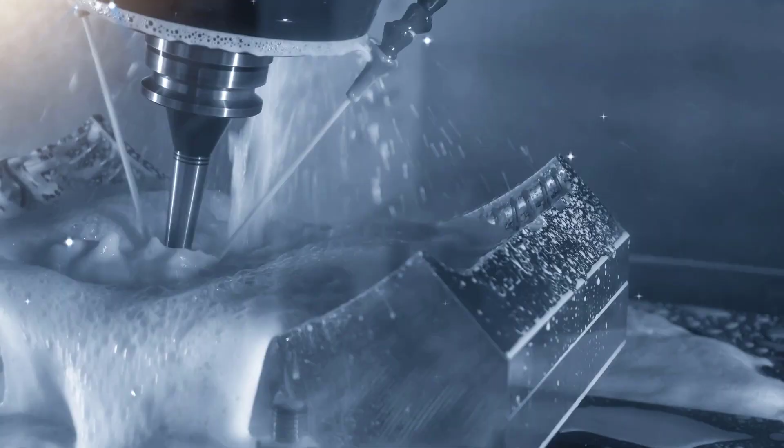My name is Stephen. Today we're going to explore the power of 5-axis machining in GibbsCAM. Let's get started. We're going to be looking at the 5-axis module today for simultaneous machining in GibbsCAM. Let's open up a 5-axis process to start.

Before I create a toolpath, we'll just look at the process dialog for the 5-axis module. This is the options tab. It has your speeds and feeds, and you can duplicate and rotate toolpaths, which CS you're going to be machining in. GibbsCAM 5-axis supports 3D cutter radius compensation, so you can adjust the toolpath at the machine for size.

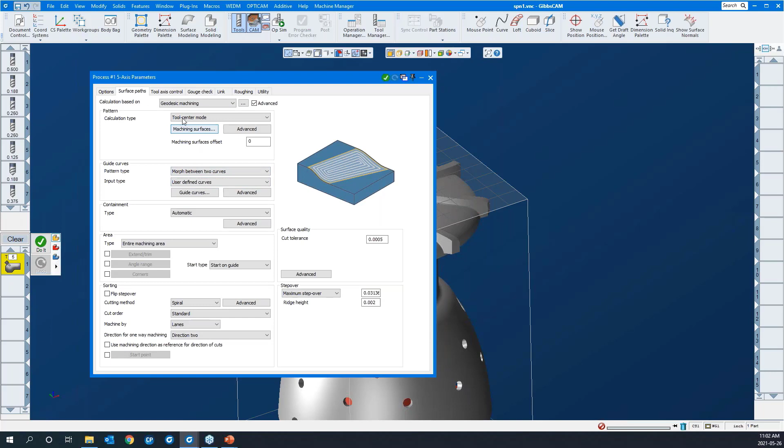If I click on the surface paths, you'll see that GibbsCAM is very graphical in the 5-axis module. You'll see any field I click on, a diagram appears to let you know what the system is expecting. And that's right across the board, almost any field you click on. So it's very graphical, and it's a joy to use.

Okay, you'll notice I'm in tool axis control, and we'll be machining in full 5-axis simultaneous. You can also go 4-axis simultaneous, or you can lock both rotary axes and machine in 3-axis as well, in XYZ. So we'll be looking at that as well.

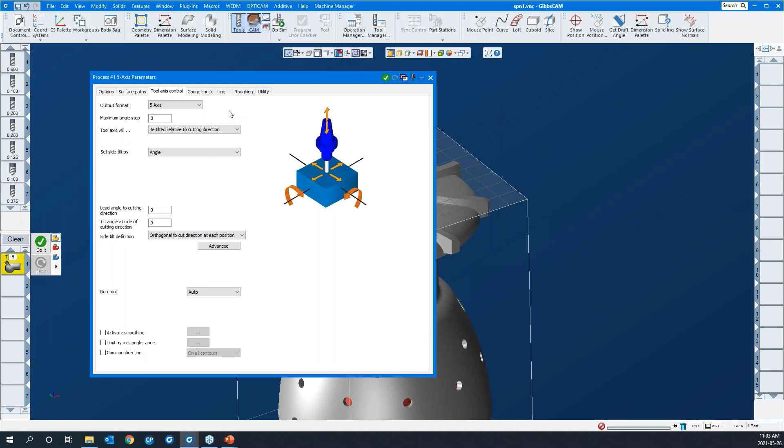Also, there's a lot of power to the 5-axis simultaneous machining strategy in GibbsCAM, and a lot of depth to it. If I just go over my calculation based on, if I'm selecting surfaces, there's a series of sub options here for different toolpath options. If I select triangle mesh, you'll see there's another subset of toolpath options. And if I go to wireframe, you'll see likewise.

So there's very many options here, okay? And we're going to cover a few of them here today. If I go back to options, you'll see there's a whole other set of toolpath options here as well. They're pointed 5-axis strategies, and we'll look at least at the drilling one today.

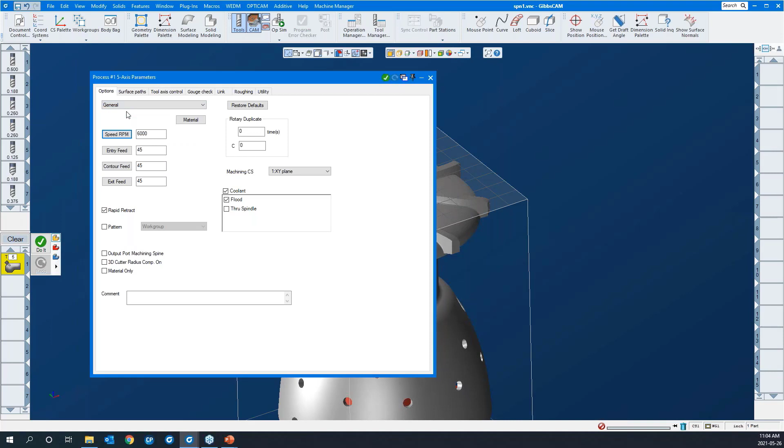Let's go ahead and create a toolpath. Okay, so our options tab is good. We're set like this. I'll go to surface paths, and I'll select surfaces to start. We'll go morph between two curves. I'll just select the first curve like so.

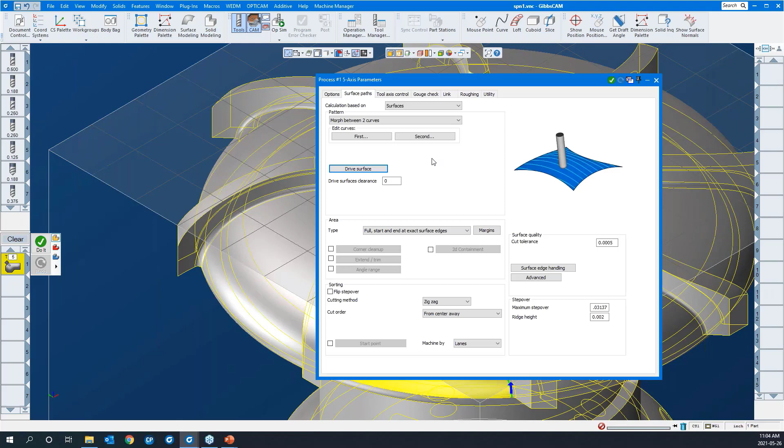And I'll say, okay, the second curve will be in here. And then the drive surface, the surface we're actually going to be machining, is this one. So those morph curves are containing the toolpath, and we're going to be machining onto the yellow surface here. Start and end at exact edges, meaning the tool is going to travel right up to these morph curves that we've selected. But if we did that, it would perhaps overcut.

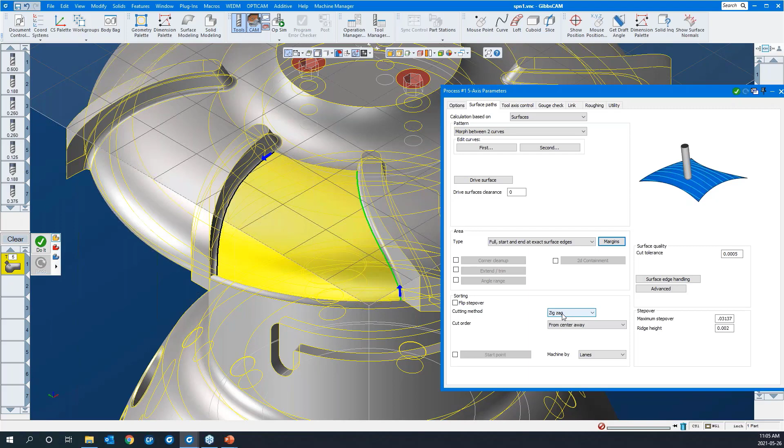So we can go to margins and add the internal tool radius, which is the radius of the tool we're using, which in this case is an 1/8" ball mill. So that'll shift the toolpath over by that amount. We're going to cut a zigzag toolpath, and we'll just use a standard. So it'll go from the left or right based on our decisions.

There's the machining tolerance. We'll keep the step over rather coarse while we're developing the toolpath. It'll calculate quicker. And once we're happy with the toolpath, we can tighten up our step over to create a nice surface finish. In tool axis control, we'll select full 5 here.

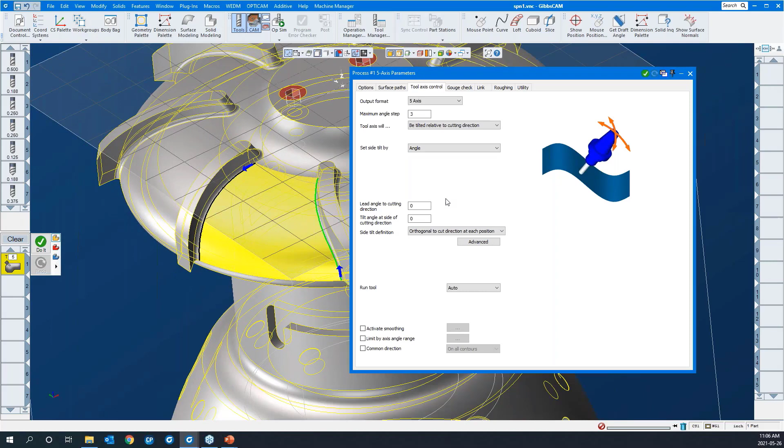There's dozens of options to control the tool axis in relation to the surface it's cutting. By default, the tool axis wants to stay perpendicular to the surface it's cutting. And for many reasons, you can alter that by adding a lead or a lag angle or a side tilt as well. And we'll discover them as we go.

In the gouge check, this protects the part from the flutes where required, or the shank of the tool, or the arbor as well. We'll come back and look at that where required. We typically only apply gouge check strategies once the toolpath is created and we see that there's a problem, when we need the tool to move away from any given feature.

The link tab is a very important part of the 5-axis module. These are important components of the toolpath. This is our first entry and last exit, okay? So the lead in and lead out. Gaps along cut are very important, okay?

What is a gap along a cut? Well, this diagram kind of displays that. And so if the system encounters a gap, do you want it to go direct or follow a surface, or it can blend the spline, or it can start retracting to different feed or rapid moves as well, okay? And then you can differentiate between a small gap and a large gap and have the system behave differently based on those.

Another one that's quite important is these links between slices. Well, what is a link? A link is the little piece of toolpath that joins the entire process together. So if you have a zigzag toolpath, there's a little piece of toolpath that links it together, and that is called the link as well. So you can go direct if you choose, or again, some of the similar options. If it's a far distance, you can have it retract to a feed distance or a rapid distance, and so on and so forth.

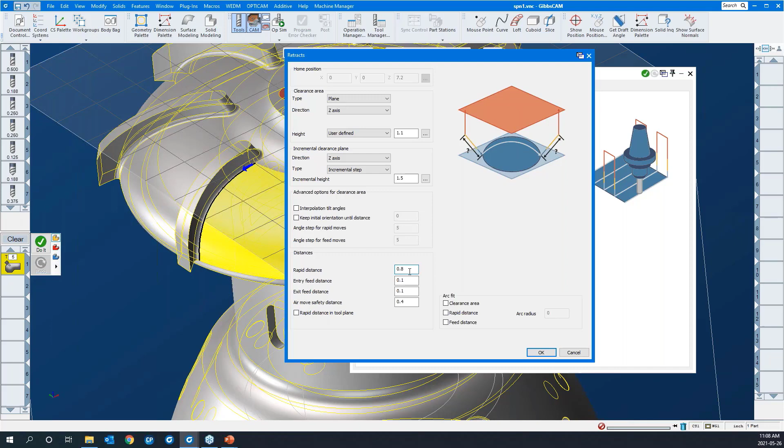Okay, again, you can differentiate between a small move and a large move. A small move, you may just need to follow the surface, but if it's a longer distance, you may want it to retract to a clearance area. So there's many different retract options, and if they're all defined in here, they're depths, okay? There's clearance area, which is the initial clearance plane. There's also a rapid entry and exit, and then a feed entry and exit, and then a rapid distance here as well. Okay, and we'll explore these as we go forward.

There's also a roughing tab. By the way, in the link tab down here, links between passes, you can do multiple passes, and then the same options appear here for how to get the tool from the end of the first pass to the beginning of the second. It's grayed out right now because we don't have any roughing strategy selected. If we come here to roughing and click any one of these, go back to link, you'll see that it wakes this up. You can see the different pass levels here.

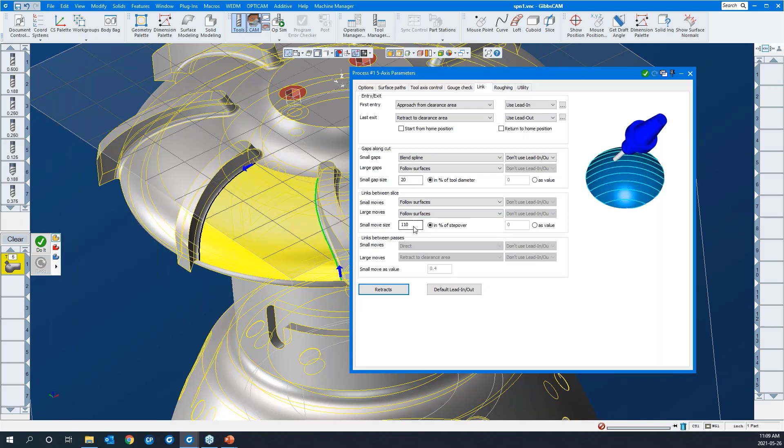Okay, down here in the lower right is the progress bar. There's a little thumbtack there. I like to keep this open during my session so I can see how long it's taking for toolpaths to calculate. Okay, so there we are. You can see there's the shift from the edge. That's the internal tool radius.

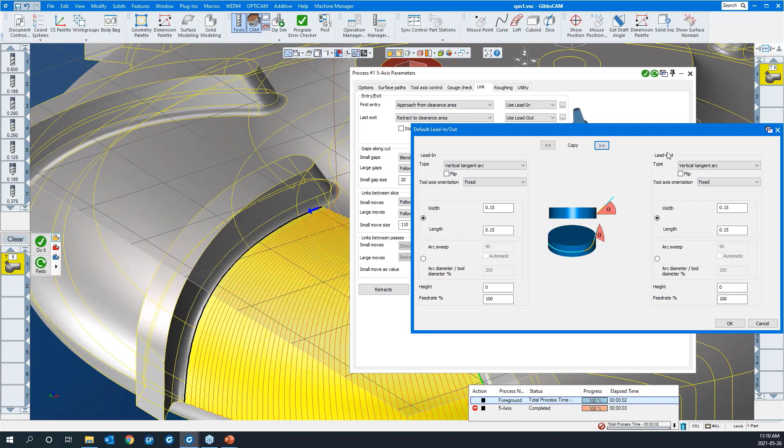We have a lead in and lead out option selected here, so I can modify those. If I go to the link tab, yes, we're using lead in and lead out. If I go to my default lead in and lead out, I can modify them here. Vertical tangent arc, I'll make them a little bit bigger like that, and I'll shift it over to the lead out just by clicking that button. I'll say okay, and we'll just hit the redo button. Okay, let's run the simulation here and have a look-see.

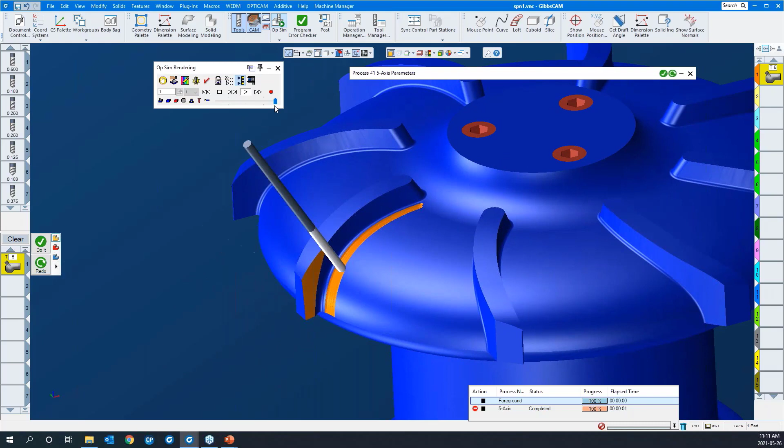And away we go. Okay, so this is OpSim right here. You can see right out of the gate that it has offended the blade there. And the step overs are rather coarse here. While we develop the toolpath, I'll keep the step overs rather coarse, and then we'll clean them up as we go. We'll see how it behaves coming up to the side of this blade here. Okay, so it seems to be clearing that one. This is our problem right now.

So we'll add a gouge check strategy here. I'll go to gouge check. I'll select it. I'll check the flute and shaft. Okay, there's three main gouge check strategies. Retract tool: you can retract the tool along the tool axis, along any of the machine axes, or from any reference point you choose. It's quite versatile that way.

The next main one is you can tilt the tool. You can use a side tilt, which is a tilt angle perpendicular to the travel of the tool. Or you can use the lead lag angle, which is along the length of the cut. Or you can let GibbsCAM take over and say, do automatic. Well, in our case, we'll go side tilt. We're gonna have the tool tilt perpendicular to the direction of cut. The parameters are, you can limit it to a maximum of 90 and minus 90. We'll just leave that as it is.

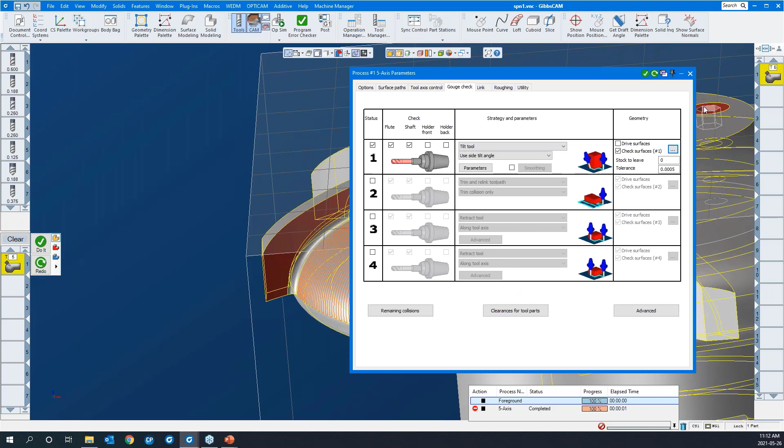And you can see there's a little jog in the toolpath, and let's look at the simulation. See how that behaves. I'll slow it down a little bit, hit play. So it comes down and you can see the tool is actually missing there. Okay, while it's running simulation, you can single block it at any given time. You can put the tool holder on there as well.

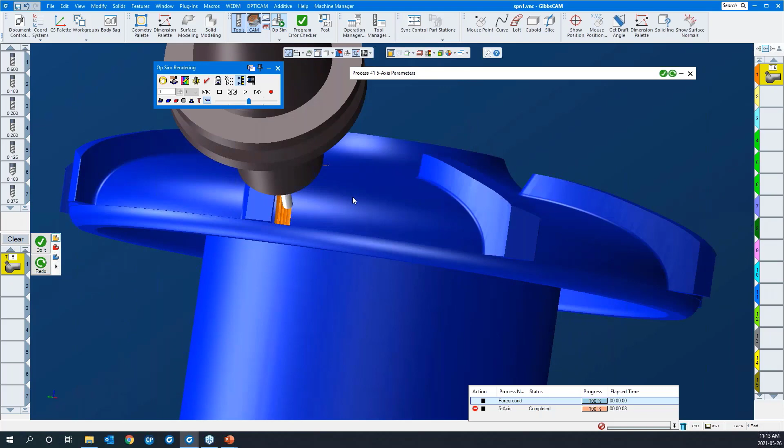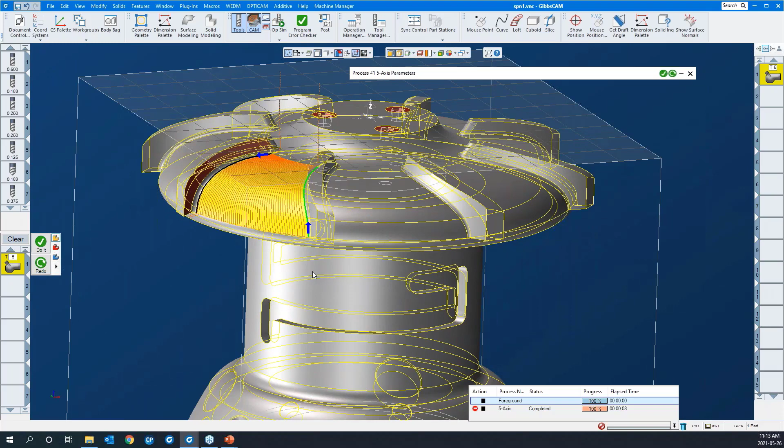Okay, and as we go through and I show you the 5-axis, I will describe some of the features available in OpSim and in machine simulation as well. Okay, so we're milling with the end of the tool here. A lot of the 5-axis module is end milling, but there's a very important component to 5-axis, and that's side milling. Swarf milling they call it, side wall axial relief feed. So let's do that. We will side mill one of the blades here.

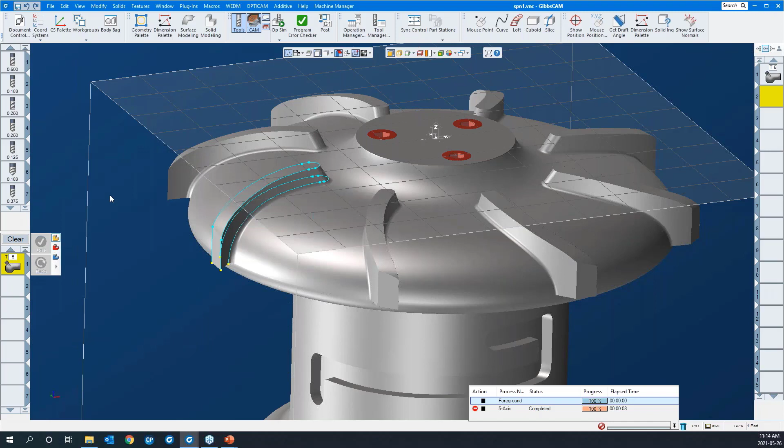Okay, in this last toolpath, I used the edges of the solid to select. You certainly can do that, but you can also use geometry that you have extracted from the solid. And I can do that in this case here. I'll create another 5-axis strategy. I'll use the same tool. Cutter comp is on by default. I'll turn it off until required. Surface paths. This time we're going to go swarf milling.

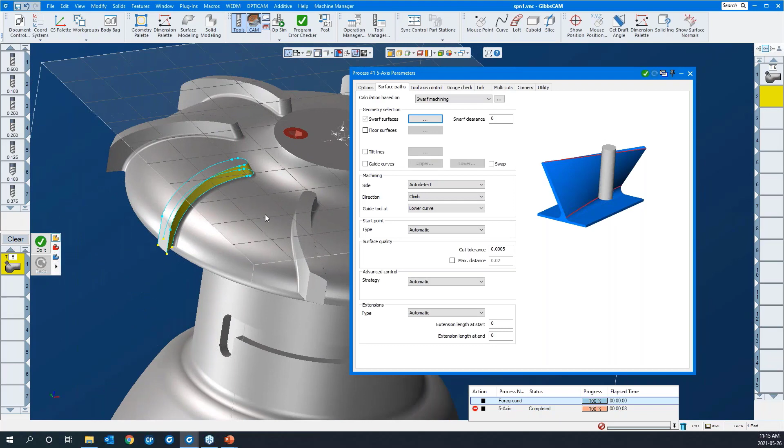Our swarf surfaces will be the walls of the blade. This one. Like so. I'll say okay to that. Okay. We'll use guide curves, which is the geometry. The upper curve will be the one on the top of the blade. And the lower will be this one. Okay. I'll say okay.

The system will auto detect which side of the surface it should cut on. It's going to guide the tool at the lower curve. The start point is predetermined. We can change that. There are our machining tolerances again. That affects the quality of your toolpath. Advanced control, we can let it go automatic, or in this case, we're going to sync the toolpath with the upper and lower curves. We can add an extension on the beginning and end of the toolpath.

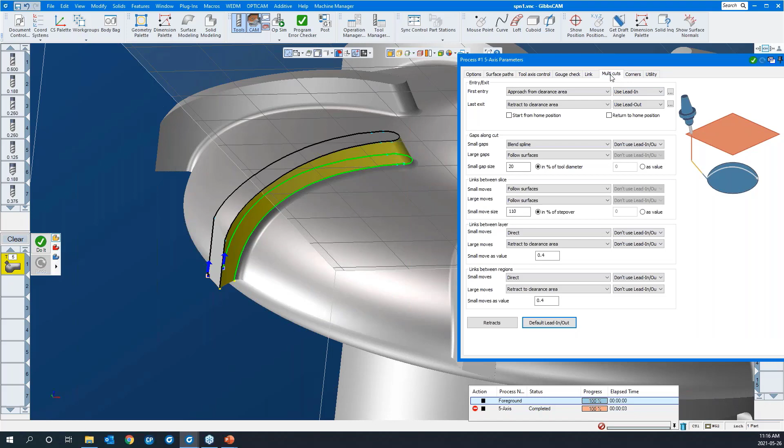We'll look at that. Under tool axis control, full 5, yes. Gouge check, we'll just leave it as it is. It's going to check the guide curves already. Okay, there's a lead in and lead out already defined here. We can remove them. If we remove them and say no lead in, lead out, you'll get an axial entry and exit. So just a straight line in. And you can do it in multiple passes. We're going to do it in one pass here. I'm going to say do it.

Like so. There's a clue when you're developing 5-axis toolpaths on the entry and exit line. These lines right here. With a bit of practice, you'll understand that this represents the axis of the tool. So it gives you a clue as to how the toolpath is going to approach and leave the cut. Let's have a look at this one. I'll just turn off the holder. Sometimes it's nice to have it. Other times it might impede your view a little bit. Something like that.

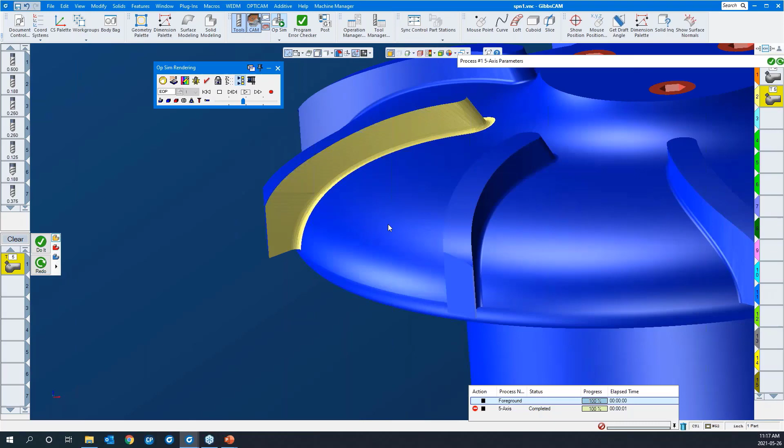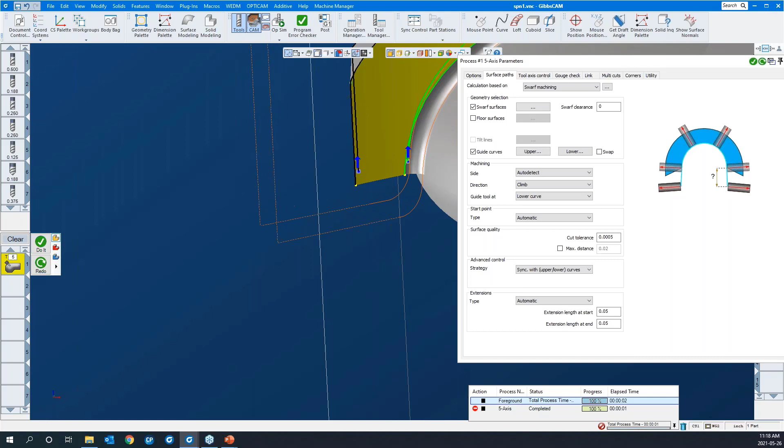Okay. You may consider extending the toolpath a little bit here. I'll go back to surface paths, extensions, the start and end. I'll just extend it by, we'll say 50 thou at the beginning, and that same 50 thou at the end. I'll just say redo. You can see the difference there. Okay, at any time, and I'll do it on the next toolpath, you can duplicate and rotate that around. There's no need to go around to each blade and do them separately. You do one and then you copy, rotate it around, like in other environments in GibbsCAM.

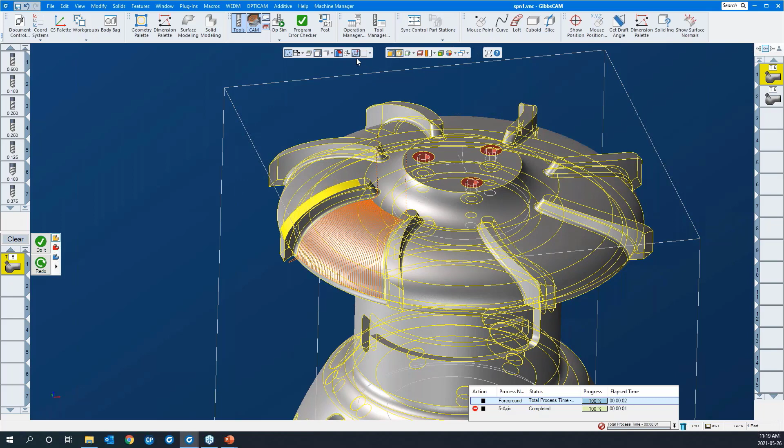Okay, let's go back to Op1. We were saying that it's a full 5-axis strategy, absolutely no problem. But you can also lock a rotary axis or lock 2. So let's look at reusing the data that we did for Op1 to cut the top of the blades. To simplify my view here, I can turn off the grid and the stock cube. Let's go in and modify the data in this process dialog to do some 3-axis milling. It's basically going to be a 3D toolpath option, X, Y, Z. I'll go to surface paths.

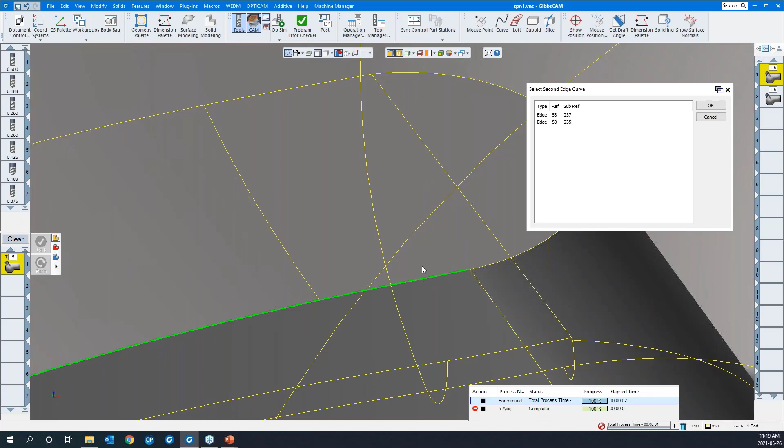And we'll select morph between 2 curves. Yes, the first curve will be this. And I'm picking wireframe from the solid again. The second curve, this one. Like so. The drive surface, or surfaces in this case, will be these 2.

We'll start and end at exact surface edges, except this time I'll remove the margin option so that the tool does go right to the edge and doesn't stay off it by the radius of the tool. I'll say okay there. We're zigzag machining. I'll set the step over to 25 thou. Okay, so you can do it by step over or by ridge height for surface finish considerations there. One drives the other.

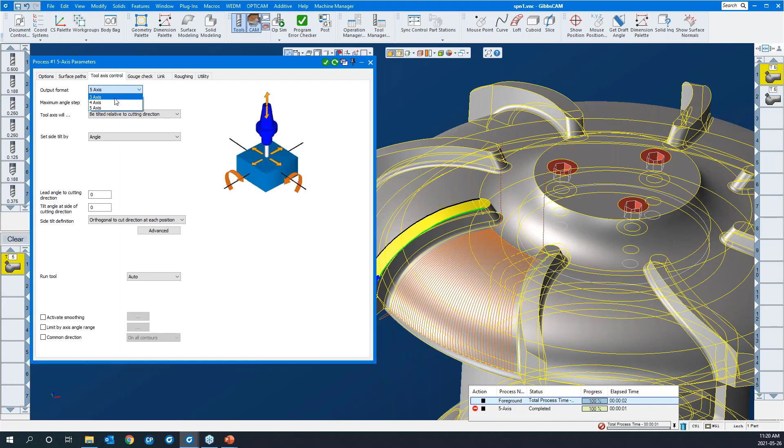If we go to tool axis control, we're going to take it down to 3-axis. If that's the case, you can machine from the XY plane. Or if you click other direction and you have a coordinate system created, you can pick the CS that you want the tool to approach from and cut on using this one. So in effect, it's 3+2 machining or 5-axis positional milling. We're going to go by the top, which is the XY plane, or CS number 1.

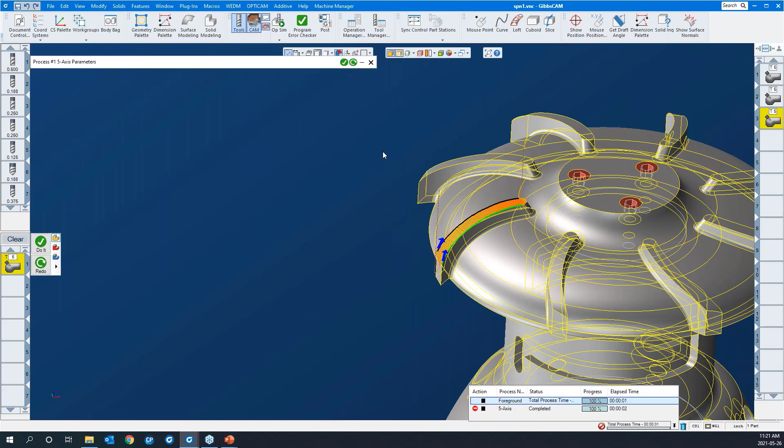Gouge check, until we need it, I will turn it off. The link tab, again, we'll leave them as is. We'll create the toolpath and come back and modify as required. At this point, I'm going to create the toolpath. I can watch it run here in my progress bar. It ran rather quickly. And you can see our toolpath here. First of all, you see that the tool is now exactly on the edge.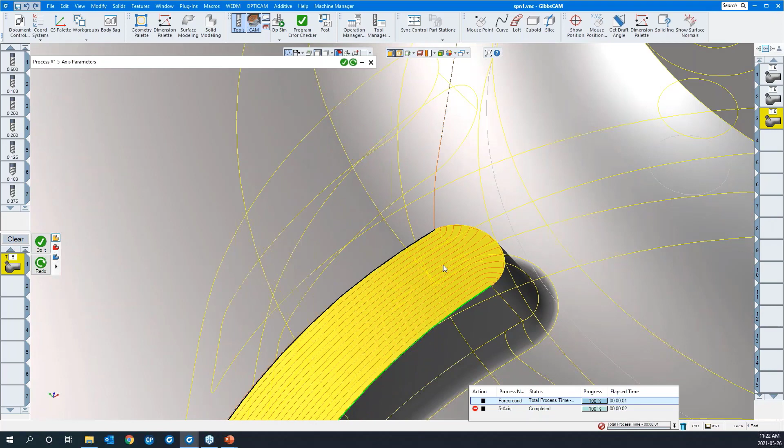Okay, I see a problem here where once the toolpath leaves the containment of these morph curves, the toolpath starts to flare out like that. So what we can do is we can virtually extend the morph curves to the end of the selected surfaces. So if I go to surface paths and surface edge handling, extend edge curve, and I'll say okay, and say redo. Okay, so that straightens that up pretty nice. If I go to a top view, we'll get a good look at that.

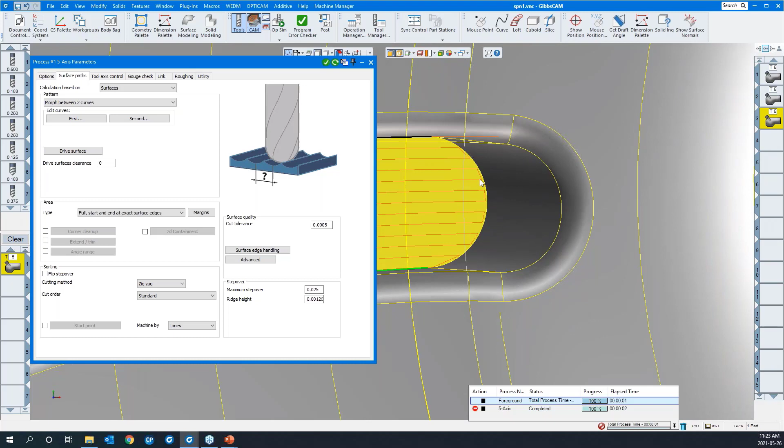Some other improvements are these are the links we were talking about. They're important components of the toolpath. And you can see that there's an abrupt change of direction there. So we would rather, where possible, have a nice blended curve in there. So if we go to the link tab, and knowing that there are links between slices, instead of following the surface exactly, we'll say blend spline in all cases in this toolpath. I'll say redo. You'll get a nice rounded curve there.

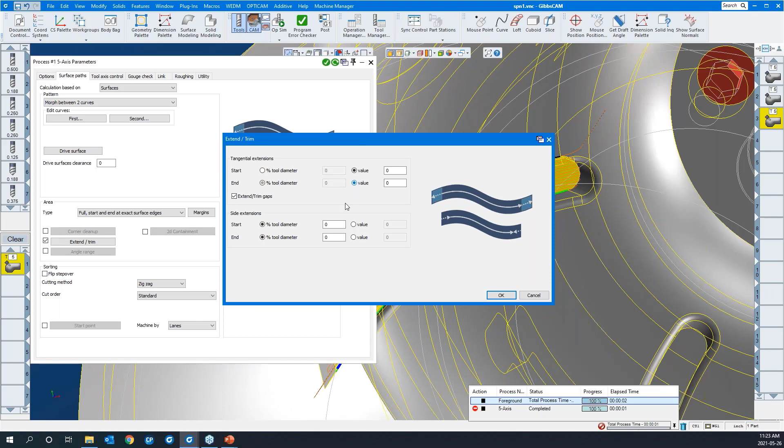One last thing you could do if you wanted, just for safety's sake, is have the toolpath push out beyond the surface. In surface paths, you can come to trim extend, and I'll extend the stroke of the toolpath. This is along the stroke. This is across the sides. Along the stroke, I'll extend it by 25 thou on both ends. And say redo. Okay, so it just pushes it out there a little bit. I'll go to a nice ISO view.

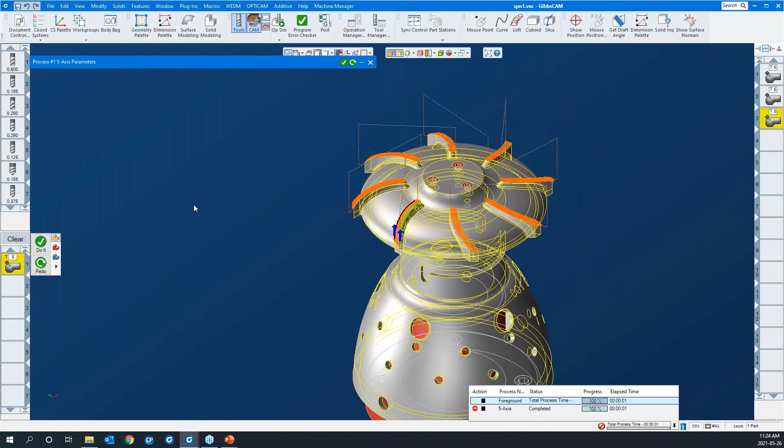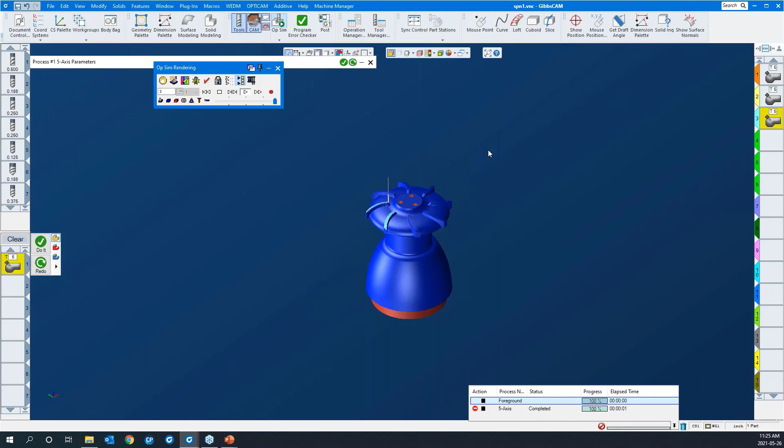One more thing we can do here is I'll go back to the options tab, and we can duplicate this toolpath 7 times over 45 degrees and say redo. Like so. I'll just run the simulation again. And hit play. Away it goes. Of course, I would do that at the end to all of our operations so that the entire part was cut. Okay. I'll turn off edges here.

So we've been creating toolpaths from scratch here. We've been building them up. In GibbsCAM, we have the ability to save these processes off. We can save all of the manufacturing data in here, your speeds and feeds, the different toolpath parameters. It also saves the tool off. So it's suitable for similar parts. So if we were cutting similar parts, we could have a series of processes available for that. Okay, so we're going to use those, and it'll just speed up our toolpath creation.

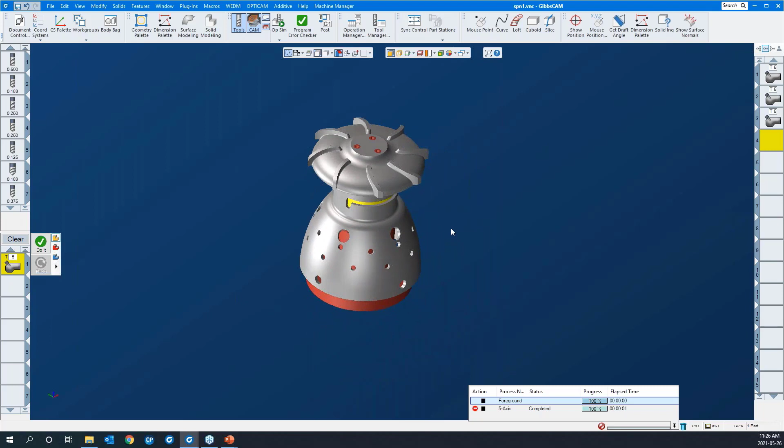Okay, we're going to look at this radial slot here. This is a 5-axis machine, has full 5-axis on it. However, if we were to rotate the part along the trunnion axis 90 degrees and access this slot, in a sense, we're now on a 4-axis mill. Although this is 5-axis, this certainly can be done on your 4-axis vertical mill or horizontal for that matter. Okay, so I'll load a saved process. I'll go load process. And I have one here called Multiaxis Rough.

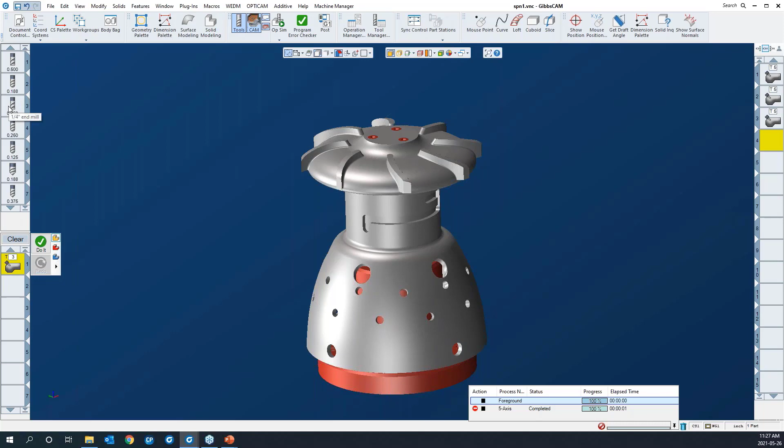We'll let it load up. It's using T3, tool 3, which is a 1/4-inch end mill to cut this feature. We can measure the width of this slot rather quickly. I'll just measure across the width of the slot, and the slot's 3/8. So our 1/4-inch tool should fit the bill for a very quick and effective roughing strategy here for some of our 4-axis work.

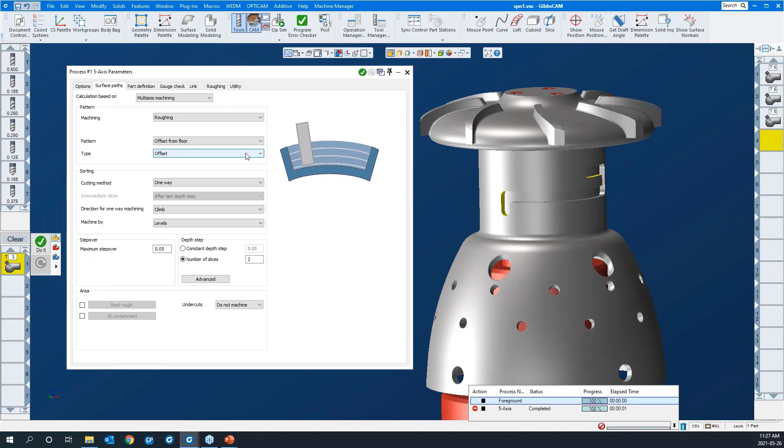We'll set our speeds and feeds. I'll go to surface paths. Okay, we're multi-axis machining here. We're roughing, which is interesting. One of the many options within the 5-axis module is offset milling, which is typical roughing. It also supports adaptive roughing, with all the high-speed machining ability of other high-speed machining strategies, such as all the curves and the corners and the micro lifts. So you can do some effective roughing. In this case, we'll stick with offset milling.

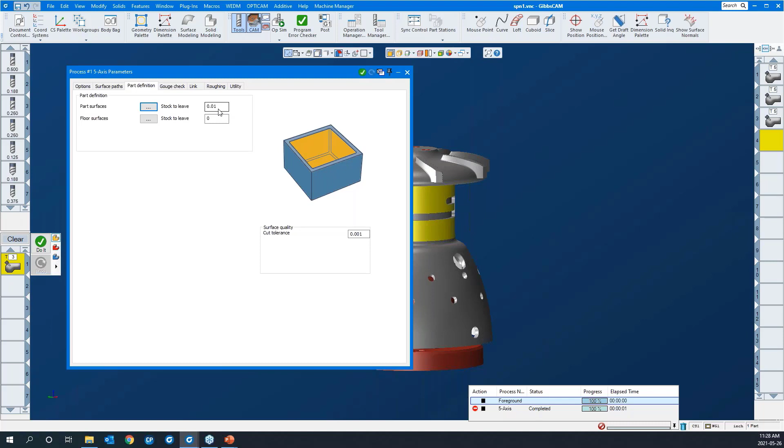We're going to cut one way. We're going to climb mill. The step over will be 50 thou stepover, we'll say. Number of passes, 2. Okay, let's define the part. The part surface will be the cylinder that we're cutting. Okay, that defines the boundary of the feature we're cutting. I'll say okay. We're going to leave 10 thou on all surfaces there. Our floor surface, I'll pick it and say okay. Gouge check where required, link tab.

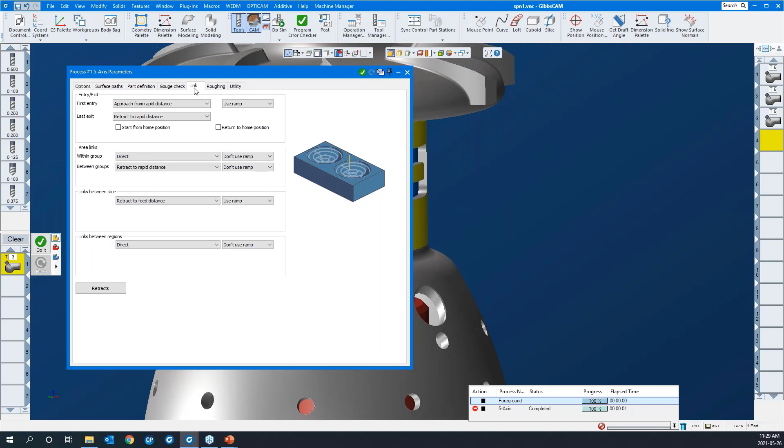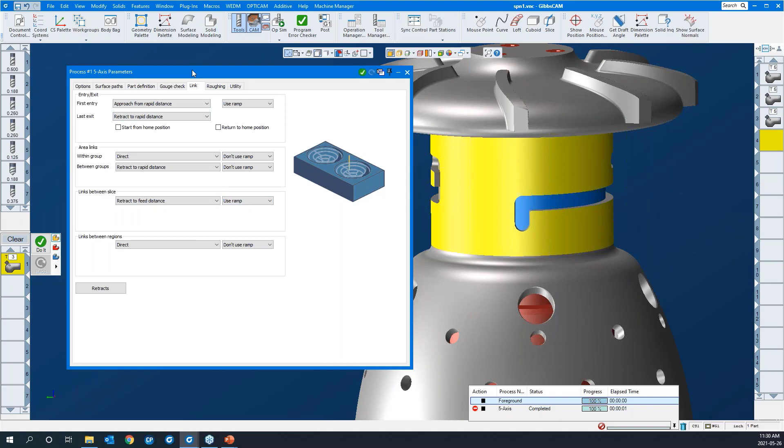Okay, we're going to have to gain entry to this slot, so we'll use a helical ramp in. Before I define what gets ramped in, I'll go to the roughing tab. We'll use helical. We'll say a 2-degree ramp angle, and the helical diameter will be 25% of the diameter of the tool we're using. Knowing that there's 2 Z depths or 2 passes that it's going to have to cut, the initial cut depth, we're going to use that ramp, yes, and links between slices or passes, we're also going to use the ramp. I'm going to say do it.

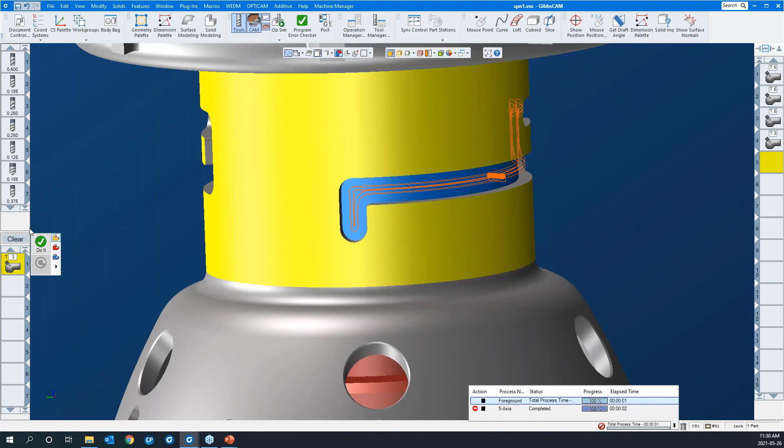Okay. So it's using the ramp, and then these distances, we want to keep them pretty tight. The initial one's using the rapid distance, and this is using the feed distance. So I'm just going to make sure that they are close to the part, but still clear. Okay, I'll create a finishing cycle here, and then we'll run these 2 operations in simulation. So like we did 5-axis swarfing, we can do 4-axis swarfing here as well. I'll swarf the slot with a 4-axis process here.

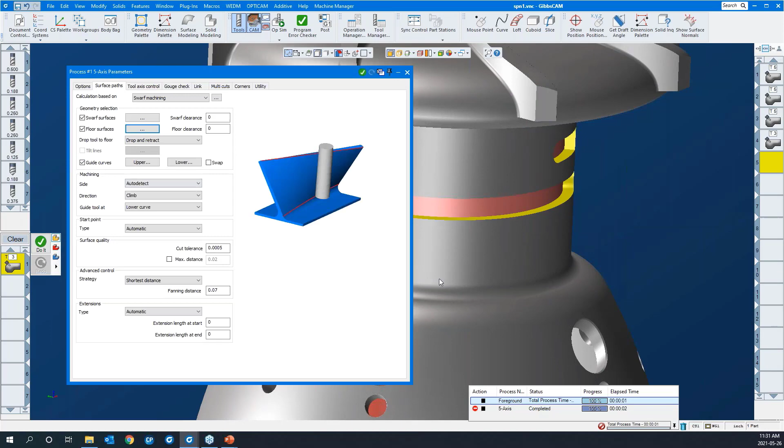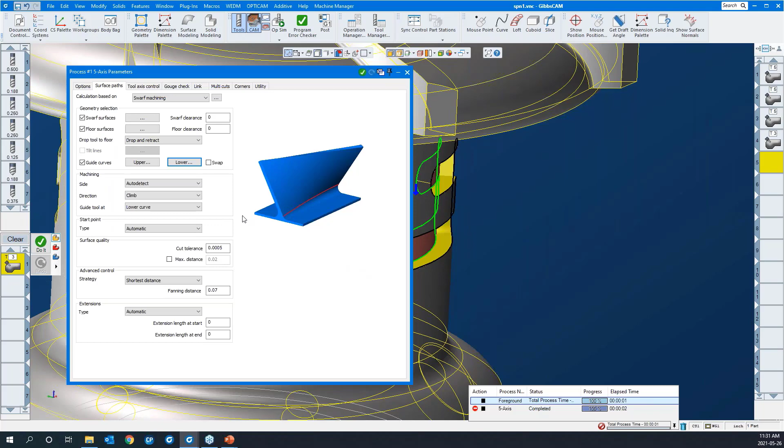I'll go to surface paths. The swarf surfaces will be the walls of the slot. I'll go select tangent faces and say OK. Floor surfaces, yes. And then guide curves. For that, I'll turn my edges on. My upper curve. The lower curve. Okay. In this case, we'll go advanced control. Instead of syncing them, we'll go shortest distance here.

Tool axis control, fourth axis. When you select the 4-axis, then you have to tell it where the rotary axis is, and it's along the Z axis of the part. So we're good there. Okay, this is going to go off center. Why? That's a big question when you're doing 4-axis milling. Of course, the 5-axis module supports off-center Y machining. If you wanted something more like polar and cylindrical, where the tool always pointed to center, the button for that is right here. If you clicked on that, it wouldn't effectively machine this feature.

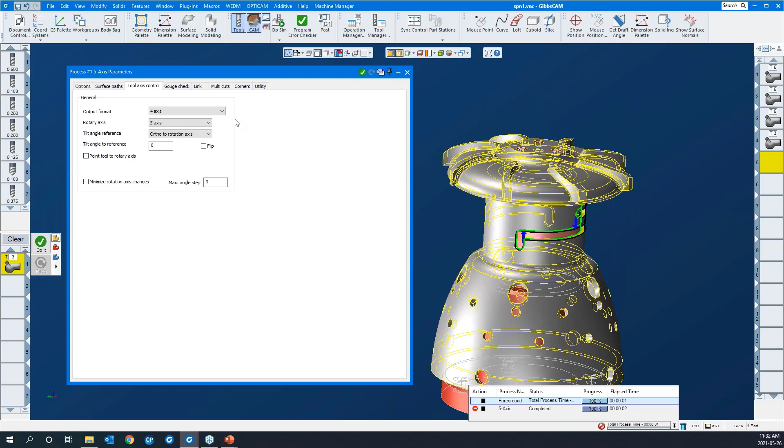Multi-cuts. This is a finishing pass. We're going to do it in one shot. And we just want to make sure there's an effective lead in and lead out here. So yes, we're going to use them. We'll go with a horizontal tangent arc, and I'll copy that over to the lead out and say okay. I'll create this toolpath.

Let's run both of those in sim mode. So as you see right now, when I run OpSim, the tool rotates and the part stays fixed, something like that.

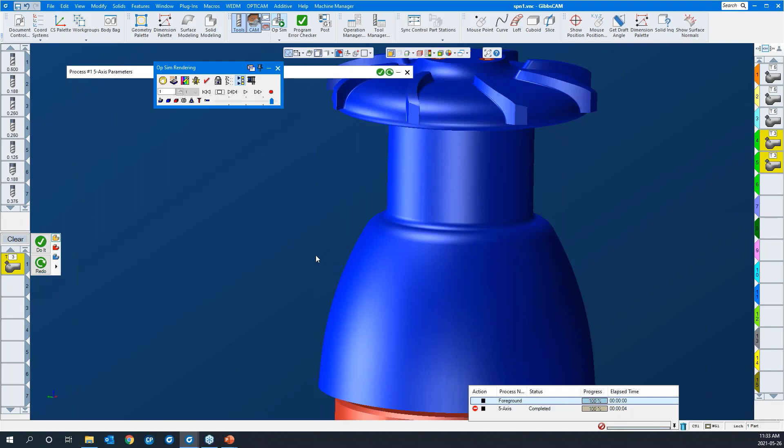I'll put the holder in and hit play. So there's the, it's helixing in to depth here, okay. So you see that happening.

If you want a more realistic view of how it's going to appear at the machine, you can change the POV lock here from fixed part to machine. Then we'll run it again, and now the tool will remain fixed and the part will rotate. There it goes.

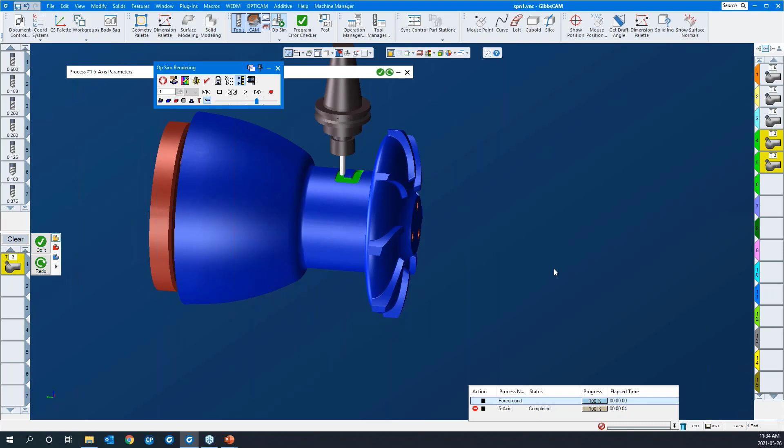At any given time, there's a show position dialog in OpSim that's kind of interesting. You can click on this, and there's sliders to control. I can lift the tool manually in Z, lift it up out of there. And then I can determine my B axis is the rotary axis, and the A axis is the tilt or trunnion axis here.

While we're doing all this, there's full collision checking. If the tool rapids any material, that's considered a crash. If the tool holder touches anything, that's also considered a crash, and the simulation will warn you of that.

So I'll take you into the next toolpath. We'll have a look, and we won't use operation sim or OpSim this time. We'll use machine sim.

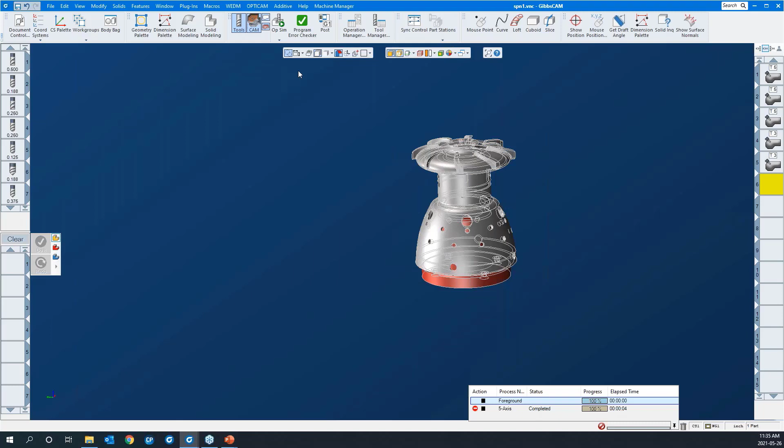Okay, let's get ready to create a new toolpath here. I'll turn off my edges again. So we're going to do some 5-axis drilling.

These holes here, we know nothing about them right now. We can just study the solid. So in combination with the 5-axis module, we can use the hole manager. I'll select the entire model and run the hole manager here, turn it on.

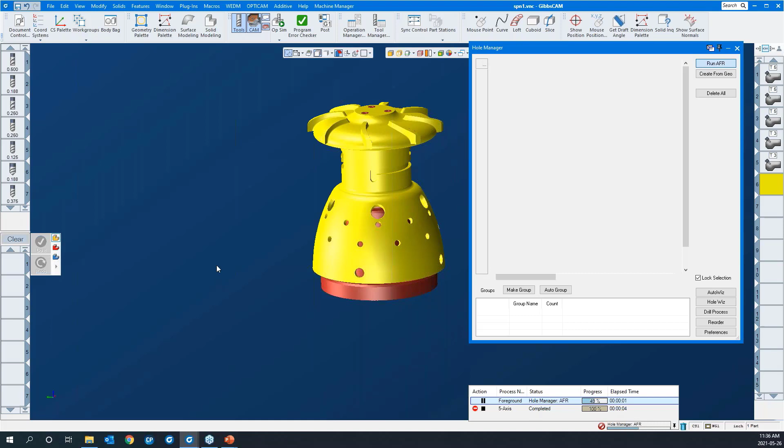We'll run auto feature recognition and give it a moment to go through the model. Okay, and it's identified them all. There's a hole feature for every hole now, okay? Some of you who use GibbsCAM may already use this feature.

We're going to use it in combination with the 5-axis drilling. If you want to find out about something, you just click on it, and it tells you right here, oh, this one's a bolt hole. You can see about it. If you want some specific data about it, you can right click on it and go edit hole.

You can see it's built from 2 segments. They call it a bolt hole, or a counterbore hole. Yeah, like that. There's a series of other ones in here.

We can group them together now and then toolpath them all at once, drill them or what have you, all at one time. So I'm going to group them by diameter. I'll select, let's see, I'll grab this 3/8 hole and the rest of them.

And I'll say make group. I'll just give it a name, something descriptive, something like that.

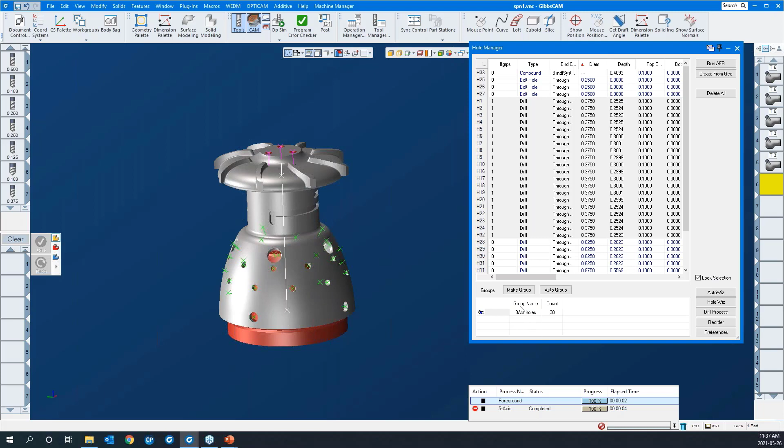What about these ones here? There's these bigger holes here. You can pick on them. Diameter 875, so they're 7/8 diameter. I see 5 of them that are the same. So I'm going to group them as well.

Give them a name. Okay, so we're all set to go. When you need to select them, you just pick them by group. They all highlight. So we're good to go.

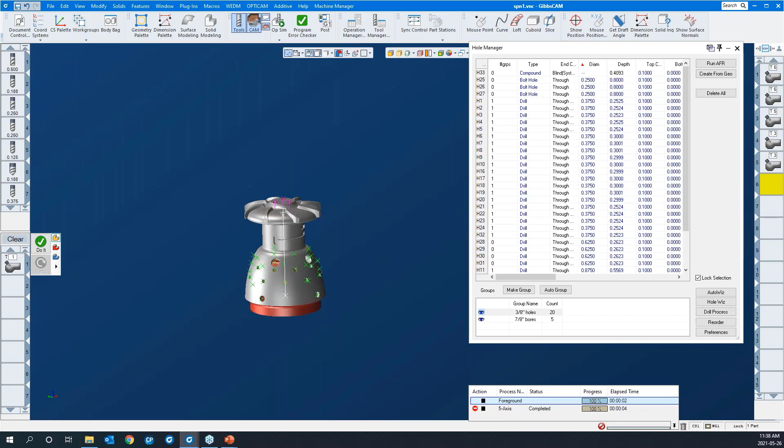I'm going to build up a process, grab it from our saved processes. I'll go with helix bore. So all of the drilling options that are available in the drilling process in GibbsCAM are available in 5-axis drilling as well. So we're picking drilling here.

Under drilling options, we have all of our drill, the mill bore, tap, rigid tap, your pecking options, so on and so forth. We're going to go helix bore in this one.

We're machining from the feature, so we'll be using the data in here. We want to concern ourselves with the bottom of that hole because we want the tool to break through the bottom. So if that's the case, there's some modifiers here.

We're using the feature to create the toolpath. We're going to adjust so that the tool starts 50 thou above the feature and the entire depth breaks through the bottom by this amount, to full diameter depth.

There's Gouge Check and a link tab as well. Let's create the toolpath and see if they're required. I'll pick the 7/8 inch bores like so, and say do it. It's as simple as that.

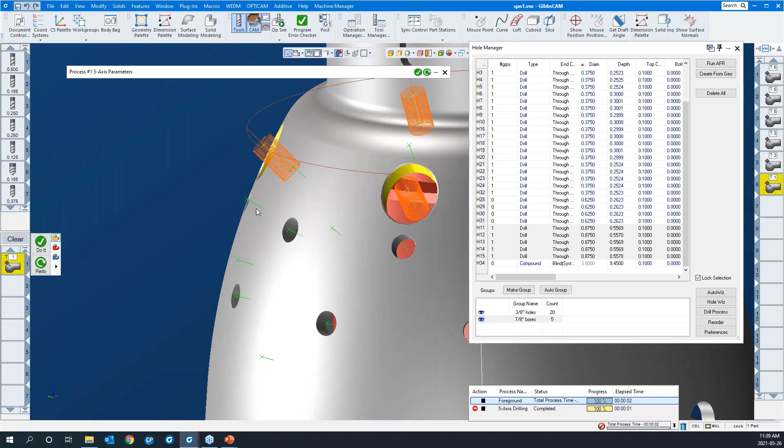Okay, it doesn't create a coordinate system. It supports, well, when we get to the drilling, it'll support drilling cycles as well. Okay, I'll do another one here.

I'll go load the process list, and I'll peck drill those 3/8 inch holes.

Let's have a look here. In this case, we're peck chip breaking. We're going to peck in by 0.15 inch, retract 25 thou. Again, we're going to make sure the tool drills through the bottom of the feature. There's an adjustment here as well, like so. I'll select the 3/8 holes and say do it.

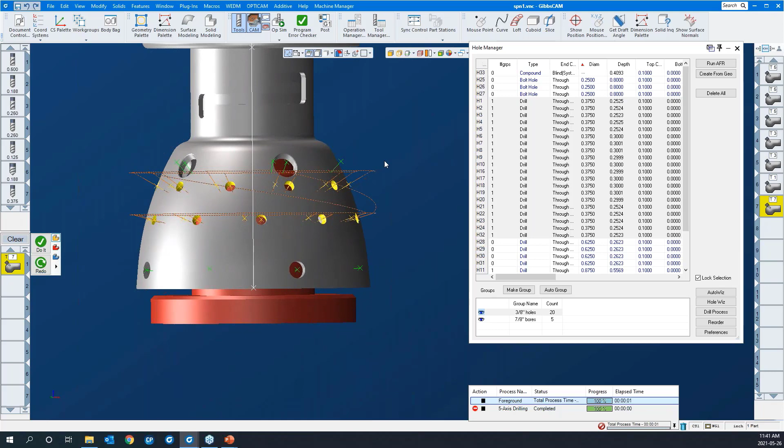So there it is, done in seconds really. Okay, you can see that without running the simulation, that the tool seems to be moving around quite a bit from hole to hole. There's not a lot of order in that.

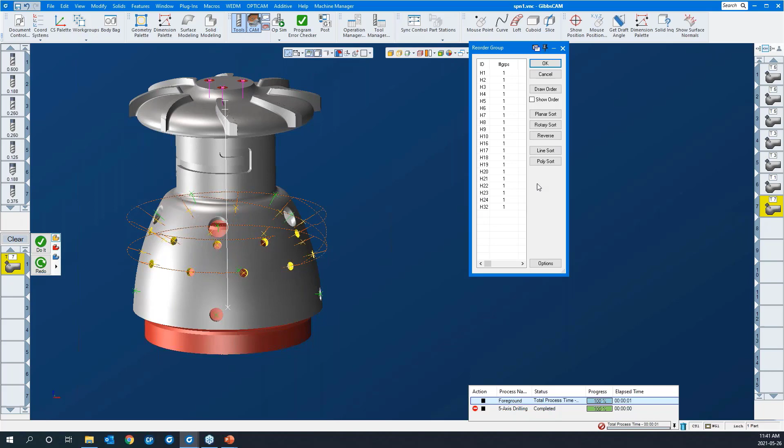So we can reorder the group. Right now this is just the order they're being done, basically in chronological order. You can show the label of the features like that, but what we want to do is reorder them. So I'm going to use a rotary sort, because we're rotating the part to drill these.

We'll prefer a rotary direction. We'll go clockwise. We're going to sort it around the depth axis and say do it. Okay, you can see where it has reordered them here. I'll say okay, and we'll redo it.

Now you can see only one shift before it gets to the lower ones. Okay, so let's run that. I'll just close off the hole manager, and instead of OpSim, we'll go to Machine Sim here.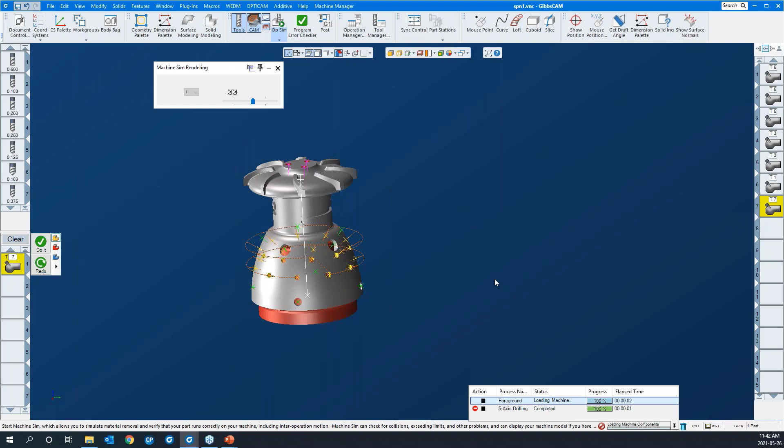I'll put selected ops on and hit rewind so that we can have... okay, it's getting ahead of me. There we go. I'll hit rewind, it'll reset the machine up, like that. And I'll hit single block just to slow it down a little bit. Single block it. And away we go.

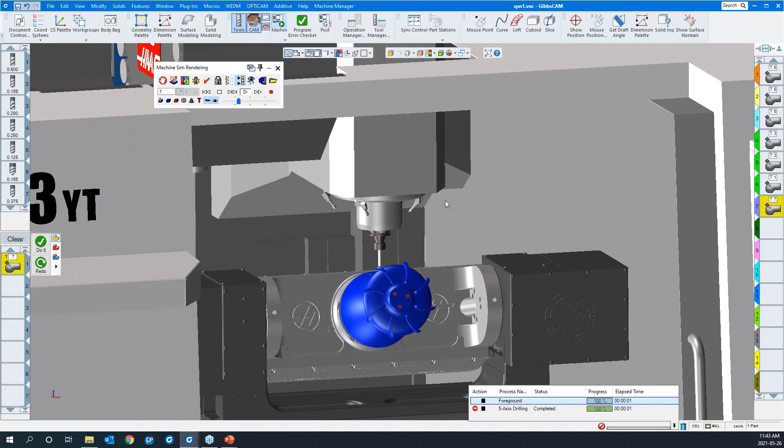So that collision checking we were talking about in OpSim is also available here, except it's checking much, much more. It checks the spindle against any component or the coolant nozzles. It checks it all, like that.

If I turn off selected ops, meaning run all of the operations, now I can just let that get going here, and you'll see that it pops out. Yeah, like that.

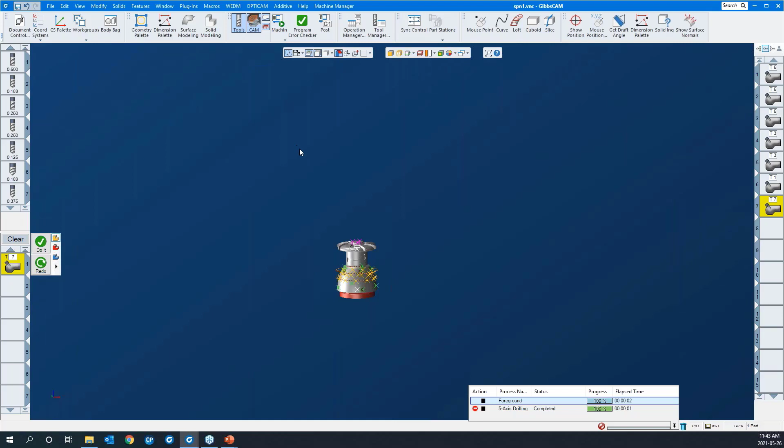Okay, there's a couple other toolpaths I'd like to show you. If you want, you can keep these hole features, but along the floating taskbar, you can just turn them off so that they're not visible.

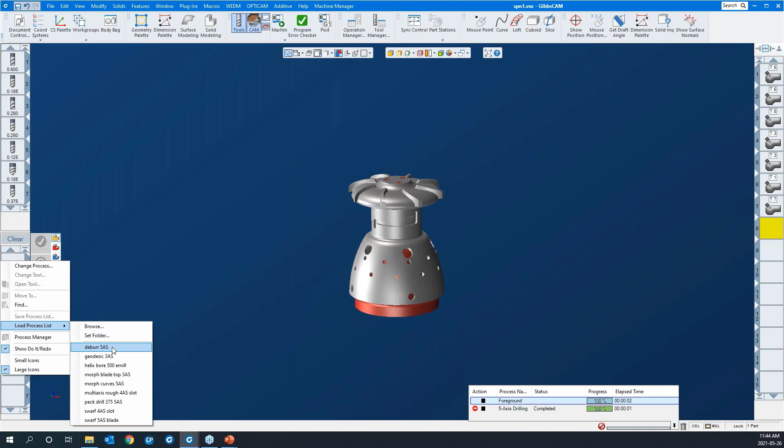There's 5-axis deburring, automatic 5-axis deburring in the 5-axis module. Let's just have a look at that. I can pick the entire solid and have it go at it, then exclude edges or what have you. But what I've done is I've created a feature that defines the blades, and we'll have a look at that.

So I'll open up the process dialog. Under surface paths, we're now deburring my part surfaces. I'll pick them. I'll open up my feature manager and just pick the blades. I'll say okay.

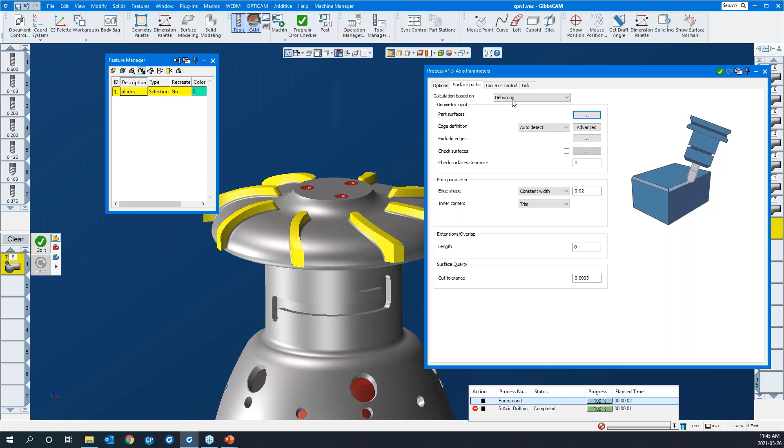Okay, you can exclude edges or check surfaces for fixtures, what have you. Here's the size of the edge break. I'll drop that to 10 thou. If tool axis control is vital here, we can just go full 5, which we are.

But you can go 4+1, lock a rotary axis or the tilt axis and go. 3+2, as I was mentioning, for 5-axis positional milling. You can do it on a 4-axis mill, or just straight 3-axis if you only had a machine with no rotary axes. Okay, we're going full 5 here. It's as simple as that, really.

One thing we're going to use, and it's available across the board, is this clearance blend spline. Rather than an abrupt lift and over and then back down, it actually creates a nice curve reposition move. You'll have a look at that here.

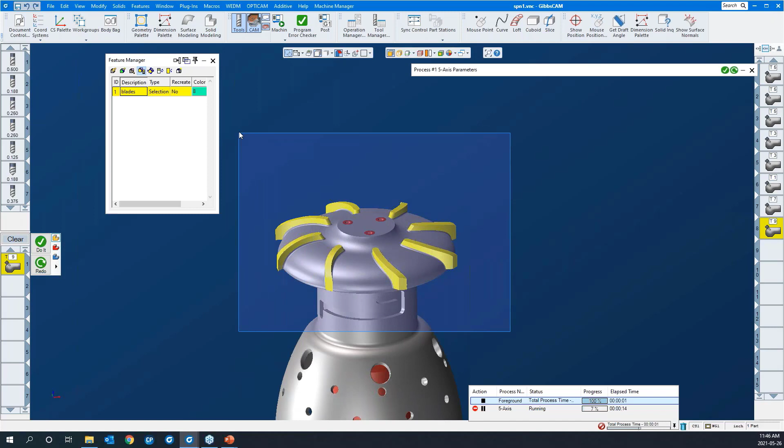I'll say do it. Give it a moment to calculate. While it's calculating, GibbsCAM is multi-threaded, it allows you to continue on. I could develop new toolpaths, solid model, create a tool, what have you.

I'll go back to OpSim here. You can see those, and I'll make sure that we are, yeah, fixed part like that, and hit play. So it's missing, as it cuts down the walls it actually tilts the tool away. I'll have a look at that. So it's automatic deburring cycles, and then you just exclude what you don't want.

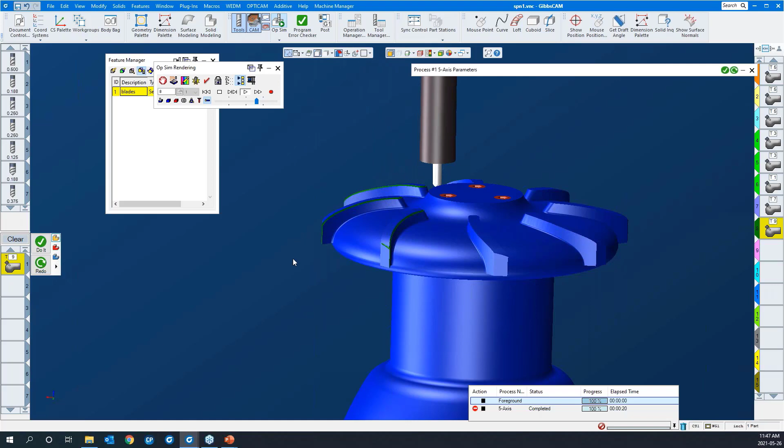Very powerful. And here's the clearance blend spline moves, okay? Nice soft repositioning moves, easier on your machine, okay?

We have one more toolpath we're going to look at, and we're going to wrap it up here. It's basically just a straight 3-axis finishing strategy.

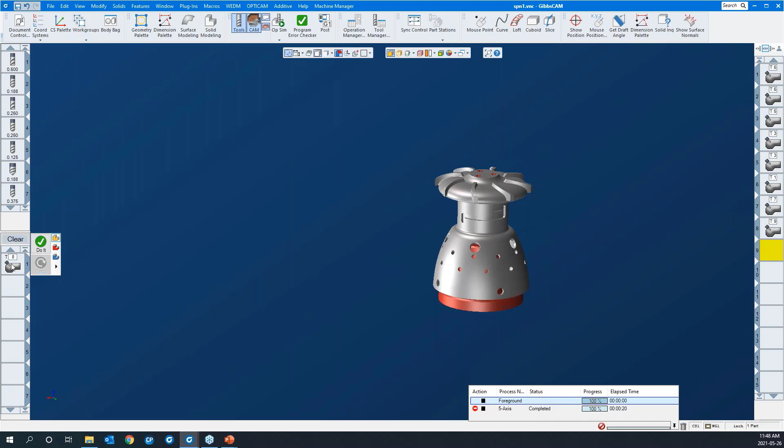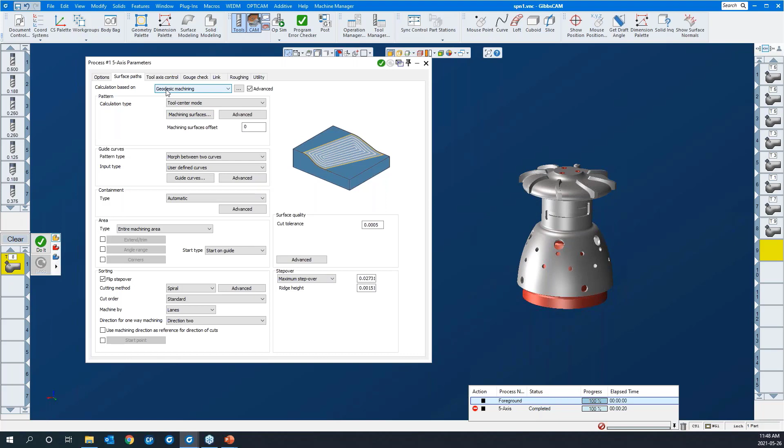Okay, I'll load it from the process list here. It's called geodesic machining. You guys may have heard about this, but it makes just high quality toolpath options. Let's have a look at this. Under surface paths, it'll be geodesic machining. What that means is it puts a geodesic mesh over any surfaces you select and then machines that geodesic surface. That's similar to triangle mesh, but the quality of the toolpath is just fantastic.

Okay, so we never did focus on that surface there. I'll go guide curves. I'll pick this upper edge and the lower edge here.

Okay, you can see that it didn't behave the way I wanted. So what I can do is right click here and go 2D chain rather, and double click on this edge again. You can see it now chained it up the way I wanted. I'll include that one as well. Say okay.

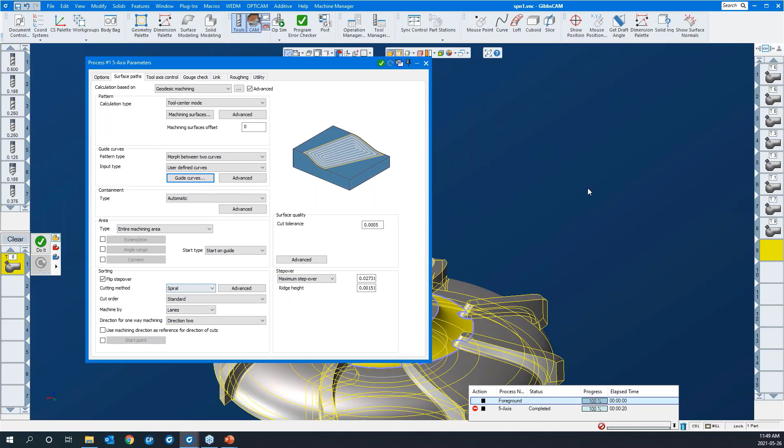Okay, we're going to spiral up or down based on whether we have flip step over on or off. If we are spiraling, you typically want to do a full pass or full contour at one depth at the beginning and end, and we'll continue with that. Here's your step over amount by step over or by ridge height. Tool axis control. In this case, we said 3-axis.

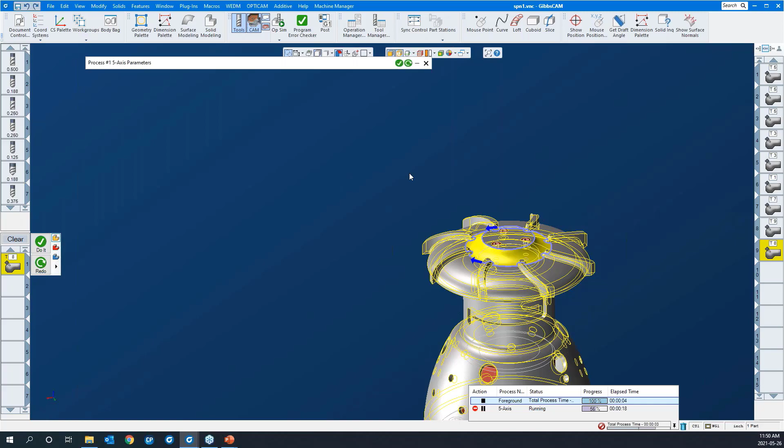Gouge check, only where required. Let's create the toolpath. I'll give it a moment or two to calculate, but very robust toolpath, very quick to calculate, very high quality. Something like that.

Let that run. Something like that.

So that's where we're going to end it off today, guys.

As you can see, the 5-axis module in GibbsCAM is very powerful and easy to use. We used 5-axis strategies, we went to 4-axis, we went to 3-axis. Hopefully we showed you a lot in a short period of time. There's much more to it. This was only the tip of the iceberg. There's a lot left to certainly display.